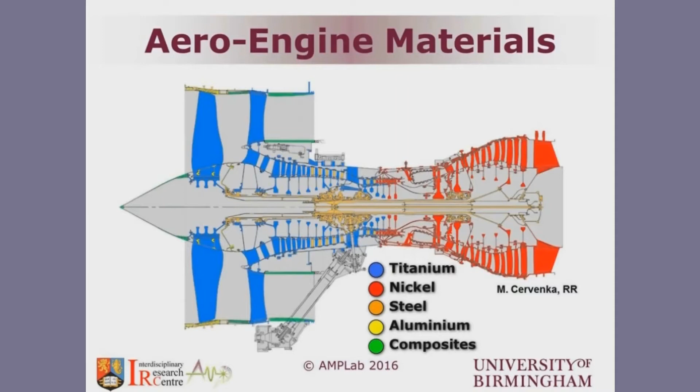Most of the components there are either forged materials or cast materials. There's also the single crystal nickel superalloys, which are used to take very high temperatures towards the back of the engine. In fact, the largest amount of material by mass within an aero engine is probably materials made out of nickel superalloys.

But nickel superalloys are rather complex. They basically contain more than 10 alloying elements in some cases. They can be even more complex beyond that. They contain elements like chromium, for instance, that is used to improve their oxidation resistance, as well as elements like titanium and aluminium that form precipitates to strengthen them. In addition to other alloying elements like molybdenum, cobalt, niobium, zirconium, boron, and iron. And these different alloying elements have various roles in the nickel superalloys achieving their properties that we require.

As a matter of fact, the way that the microstructure behaves is rather complex, since some of these elements partition to specific phases. So for instance, we find that boron can partition to the grain boundary. Titanium and aluminium partition to the gamma prime phase, which is the strengthening phase in nickel superalloys. Some other elements like niobium partition also to the gamma prime and gamma double prime.

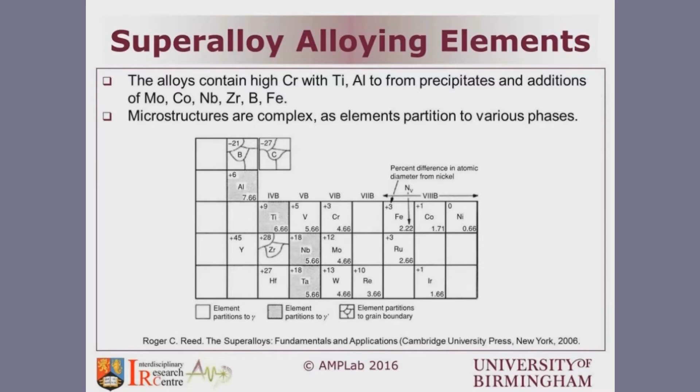So the role of the different elements can be quite difficult, and that adds to the complexity of nickel superalloys in general, and also the complexity of how we think about them as a material to be used for additive manufacturing. I mean, the following slide is probably just to further strengthen the previous point I mentioned.

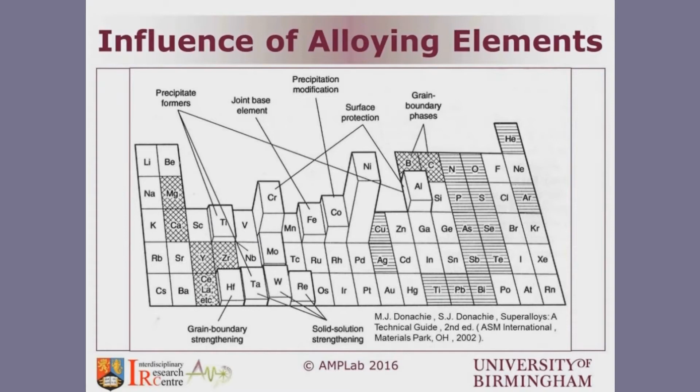It shows what role the alloying elements play in terms of the performance of nickel superalloys. So some elements are used for oxidation resistance, some are used to control the precipitates and their types, some other ones like tantalum, tungsten and rhenium can be used for solid solution strengthening. But overall, if we're dealing with an alloy class that attracts at least a dozen alloying elements, you would expect that this will become rather complex when you look into its processing by any manufacturing technique.

So over the last 6 or 7 decades or so, nickel superalloys have gone through a significant development. All the time we were seeking a higher temperature capability in nickel superalloys. Initially in the 40s, the 50s and some of the 60s, we were looking into the development of the high temperature capability, and initially we started with wrought or forged materials. And eventually we started to look into more complex applications, into blades that can take higher temperatures, and then casting of other materials like Inconel 713, 738 and 247 started to appear between the 60s and the 80s.

But then from the 70s and beyond, we started to move into directionally solidified superalloys and then eventually into single crystals. And as you can see, looking into how the temperature capability of nickel superalloys evolved within the last 60 years, we evolved approximately 400 degrees in the temperature for their creep life at 137 megapascal, as shown in that diagram.

Now, how is that all relevant to the concept of additive manufacturing? Moving in the alloy chemistry and moving in their high temperature capability also meant that we have to move in their chemistry. We have to design an alloy that's capable of giving us a high temperature performance. And as a matter of fact, that resulted in us adding more alloying additions of elements like aluminium and titanium, which can strengthen the material by the formation of the gamma prime phase.

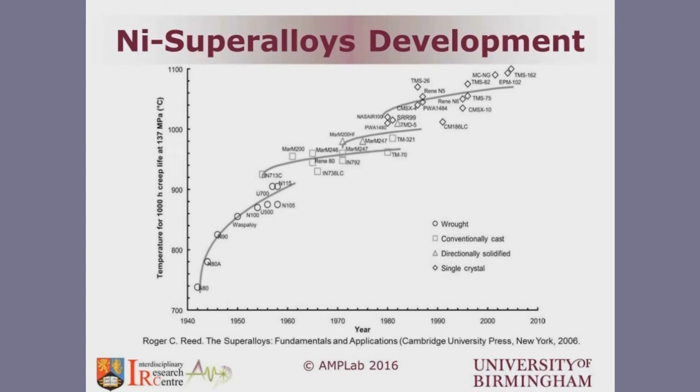We also added some other elements like cobalt and chromium to increase the higher temperature oxidation capability and also the control of the phases that are present, like the carbides, within nickel superalloys. And as a matter of fact, the more we added of these alloying elements, the more it became difficult for us to weld these nickel superalloys.

Basically, additive manufacturing is like welding. You're welding many layers, and instead of welding a few layers as in a weld bead or so, you're welding maybe hundreds or thousands of layers every time you're building a component. And as a matter of fact, the same issues that we see in welding of nickel superalloys will be the same issues we see in additive manufacturing of nickel superalloys.

So this diagram that we see in front of us shows a qualitative indication of the weldability of nickel superalloys as a function of the alloying elements. In that case, on the x-axis, you can see the chromium and cobalt as one factor. There's an equation here, 0.28 chromium plus 0.43 cobalt on the x-axis, and then the aluminium and titanium on the y-axis, which are actually the elements that form the gamma prime phases. And what you will find is that the higher the aluminium and titanium content, we end up getting more difficulties in welding.

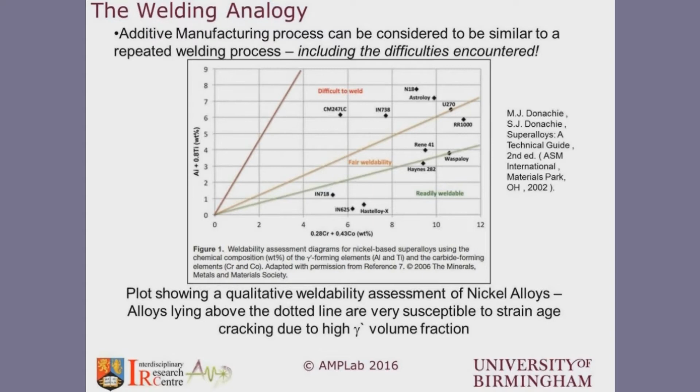So that qualitative classification we see on the diagram shows the typical alloys that people have used in the 40s and the 50s as alloys that are readily weldable. But as we move in that high temperature capability of nickel superalloys toward materials like CM247, we start to appear in the difficult to weld envelope. So what is the real difficulty in welding or additive manufacturing of nickel superalloys? What's the difficulty in making multiple welds of that material, which is the same thing we see in additive manufacturing?

Basically, nickel superalloys, when we weld them, can be prone to 4 mechanisms of cracking. The first one is solidification cracking, and that's similar to cracking that we see in many other materials, not just nickel superalloys, where typically the freezing that happens combined with the segregation during solidification results in the formation of weak regions, which then, with the presence of tensile stresses during consolidation, during shrinkage, can inhibit the backfilling of the interdendritic regions, and as such will open up dendritic cracks and act as crack initiation points during solidification.

So that's one thing that can happen in nickel superalloys with the complex chemistries we see inside them, that when we are building a component by additive manufacturing or even by welding, we are likely to get that mechanism of cracking. The second mechanism is called liquation cracking, and this can usually combine with rapid heating of the material, typically away from the melt pool.

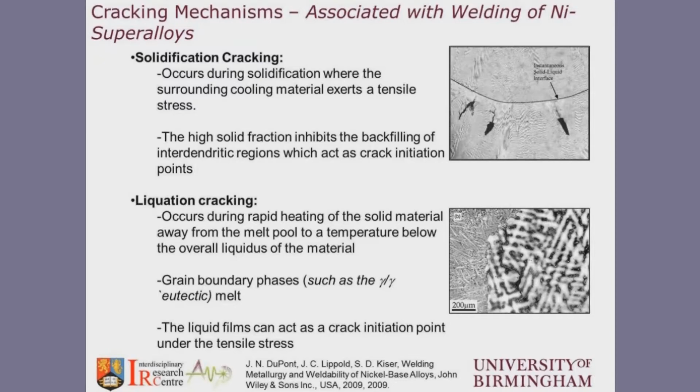So we're talking here about the material which is below the molten region, not just the molten region, but actually what's a little bit close to the molten region, but not in the molten region itself. And some phases will end up actually forming a liquid film that then will form a crack that can act as a crack initiation point under the tensile stresses.

The mechanism itself is not fairly clear about why it happens, but there's a chance that it's accompanied by the presence of phases like carbides causing incoherency on the grain boundaries, combined with the residual stresses, resulting in the formation of cracks.

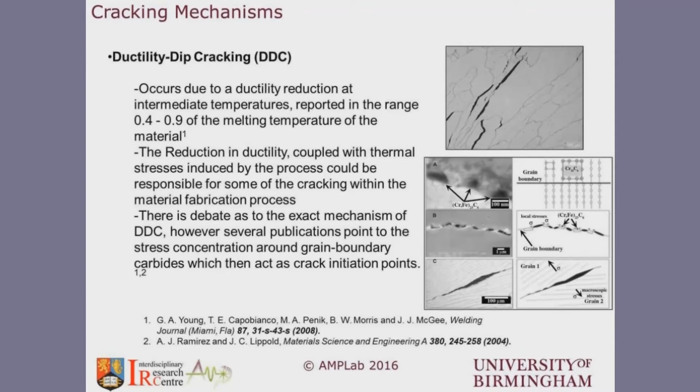Then the fourth mechanism that we also are aware of in nickel superalloys is the mechanism known as strain age cracking, where typically if you weld the component, that welding process with its rapid heating and cooling phases will result in the formation of residual stresses.

So those residual stresses, when we apply a heat treatment to relieve the residual stresses, the competition between the gamma prime precipitation and the relief of residual stresses will result that at a point the material will have combined stresses from the shrinkage related to the gamma prime formation and the ductility resulting from the presence of cracks. And as a result, cracks will open up.

In simple terms, typically you will end up building a material by additive manufacturing or welding it, and when you weld it or build it, it doesn't show any cracks. But then you expose that material to a stress relief heat treatment, and it actually cracks within the post-weld heat treatment process. And that's what's known as strain age cracking, or post-weld heat treatment cracking.

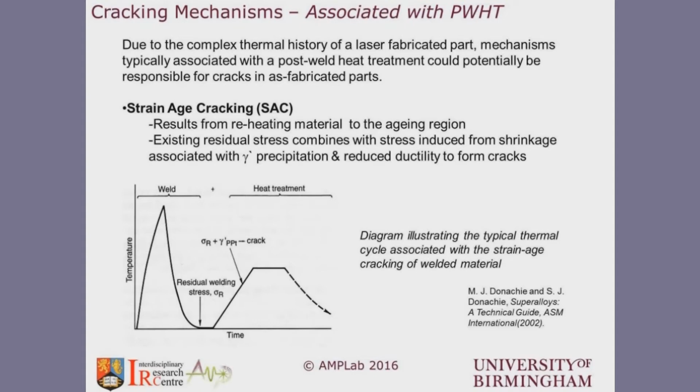So any of these four mechanisms, in the same way that they happen in welding, they can happen in additive manufacturing. And for a crack to happen, as it's obvious within the four mechanisms, there has to be another element, which is residual stresses. And that adds to the complexities we have in additive manufacturing, that the process involves repeated heating and cooling, and as a result, we need to control the residual stresses that happen, or at least understand how they evolve.

There are some good reports in the literature talking about the residual stress development in additive manufacturing. This is the results from one paper by Professor Das, looking into the distortion due to electron beam selective melting in Inconel 718 nickel superalloy. 718 as an alloy is known to be weldable. Actually, it's an alloy that you can build with additive manufacturing without seeing a significant amount of cracking.

But what you can see is that the substrate where the component was being built in figure D and C, you can see the amount of distortion that the component has seen. And that's significant. Obviously, that's a significant deviation of tolerances, a significant deviation of the required performance of the parts, and in most cases that will require a post-processing treatment to be able to control the residual stresses.

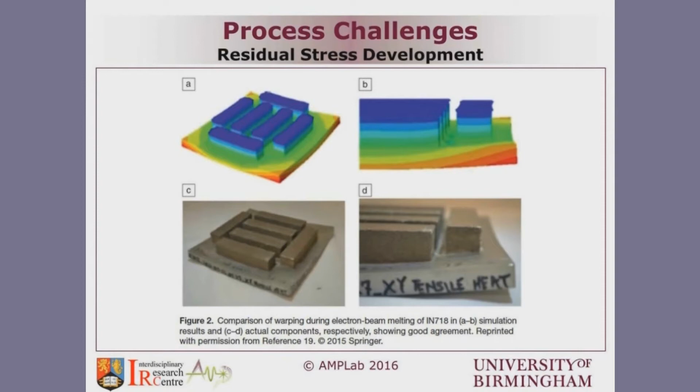But one of the key things that people have been active in developing to understand residual stresses is process modeling. And as you can see, with process modeling you can get an idea about the amount of distortion and the amount of stresses built within the material. And as a result, you can change your process sequence, or you can change your process parameters, including the scanning strategy, how the heat input is being applied, in order to reduce the stresses in the material in the as-built condition.

There are some reports also that looked into this in a different way. This is a study that came out from Fraunhofer ILT in Germany, where they looked into the influence of the scanning strategy. So basically, this is a comb-type structure, as you can see the teeth at the bottom, and they tried two different scanning strategies. The first one is A, where we're using short scanning vectors, and in case B, we're using long scanning vectors across the entire length of the component.

And as you can see, the short scanning vectors gave a slightly lower distortion, which basically explains that it has lower stresses inside, lower tensile stresses in that component. The component was validated, so they built the actual component, and then they used wire EDM to cut the teeth of the comb, except for the left-hand side end. And the amount of relief that you get because of the release of the stresses can be used qualitatively to indicate the amount of distortion.

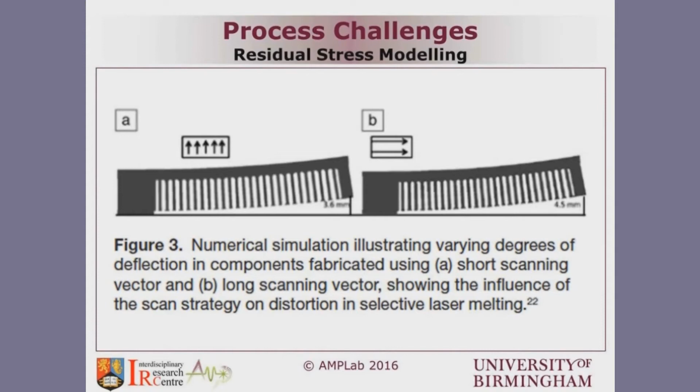But the key point we want to see here is that the process itself can be rather complex, and one change in one of the parameters, which is in this case the scanning strategy, will control the thermal fields, and as a result will also affect the amount of distortion we're getting out of the process.

The second thing that we discussed in the paper was the process optimization. How do we go on optimizing the process parameters in additive manufacturing?

For quite some time, people have been using the energy density model, which is basically an equation that lumps together many of the process parameters in a single figure of merit, a single factor, that indicates how much heat we're giving to the material, how much energy density, as a matter of fact, is being given to the material.

And that simple equation is the power over the scan speed, V, times the hatch or overlap spacing. In some other versions, we have the power divided by scan speed times hatch spacing times layer thickness. So generally speaking, this equation was used to correlate the heat input with the defects that form in the process.

In one of our reports that we published, we showed that the increase in the energy density is typically accompanied by the reduction in the porosity. So the red diamonds show a reduction in the voids or the porosity until a certain level. We call it the threshold energy, beyond which the porosity typically stays within less than 1%.

But the second factor we see is the cracking, and we do not see significant correlation here between the cracking density, which is the blue squares, and the energy density. As a matter of fact, it seems quite random to some extent. So that approach can give us a starting point, how much energy we need to give to the material to enable its consolidation, but it doesn't correlate much with cracking density.

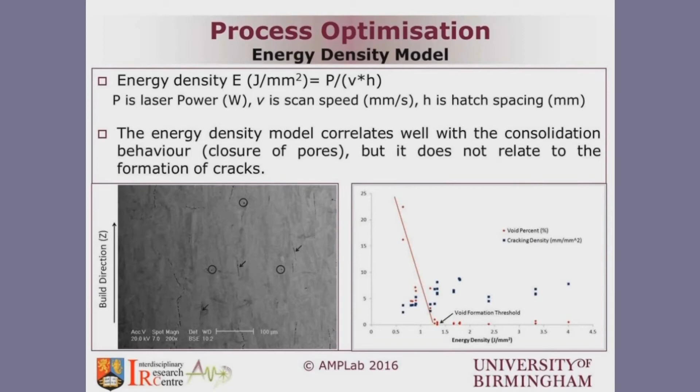And in many cases, the challenge is we have two problems to solve. As you can see in the left-hand side picture, there are the cracks, the ones that are arrowed, and the porosities, which are encircled. Basically we're trying to see if we can reduce both at the same time. In many cases, reducing the porosity means giving high energy, but reducing the cracking means giving lower energy, because the higher the energy, the more residual stresses we create in the material.

There's another report we also included in the paper, whereby we combined the data from five different studies that looked into different nickel superalloys: Inconel 718, 625, 486, 247 in different conditions. And we found again that to process nickel superalloys, you need to achieve that threshold energy density, a minimum level of maybe between 1.3 to 1.7. Beyond that level, you end up having very low porosity in the material, less than 1%.

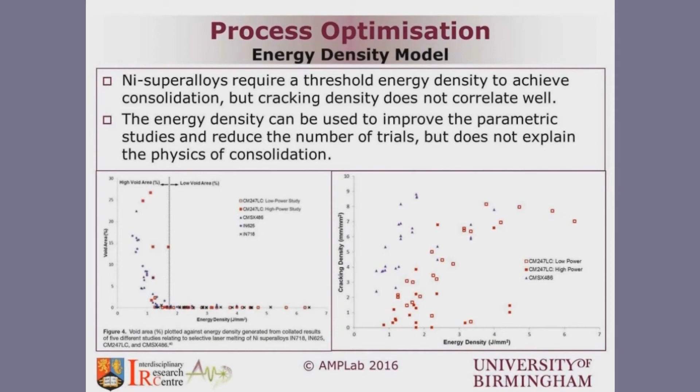But that correlation did not hold, as I mentioned previously, when it came to cracking. We still had basically an increasing trend of cracking density with the increase in the energy density, but there was still some scatter in the data, suggesting that maybe that model is good enough to look into the porosity, but it's not the best when it comes to the cracking density.

Now, where is the future heading in additive manufacturing of nickel superalloys? Many studies have shown, and as a matter of fact it's on the cover of the MRS Bulletin issue, that one of the flexibilities we have in additive manufacturing is that we can control the microstructure. The typical microstructure we get from additive manufacturing has columnar grains in some cases, extending from the bottom to the top of the build.

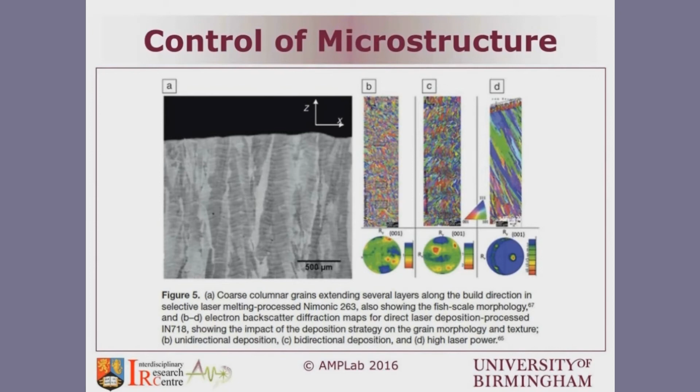Combining these things together means that we should change the way we look at additive manufacturing, from just making a component with specific properties and microstructure into making a component with more than one microstructure, with the microstructure tailored to the performance required of the final component. Then the last challenge we have to address with additive manufacturing of nickel superalloys is the mechanical properties.

Obviously, if you want to make a component, we want that component to achieve the correct mechanical properties. And there are some studies now in the literature that show that there is an increasing importance for the use of a post-processing method like hipping, like using hot isostatic pressing. So the study by Blackwell showed that you can achieve UTS and yield strength, in fact, exceeding what we get from the forgings just by doing a post-processing and heat treatment procedure involving hipping and heat treatment for Inconel 718.

And that obviously shows that it's in some way a necessity actually to use post-processing in many applications, the thermal post-processing in this case. And if you look into even the ASTM standards on Inconel 718 and Inconel 625, they both actually indicate that hipping is used whenever there is a need to maximize the performance.

There aren't many data in the literature yet on the fatigue behavior of nickel superalloy additive manufactured components, but tensile results have been promising, and I expect the results that involve creep and fatigue to appear very soon, and then we'll understand if we can improve the performance by post-processing of additive manufactured components.

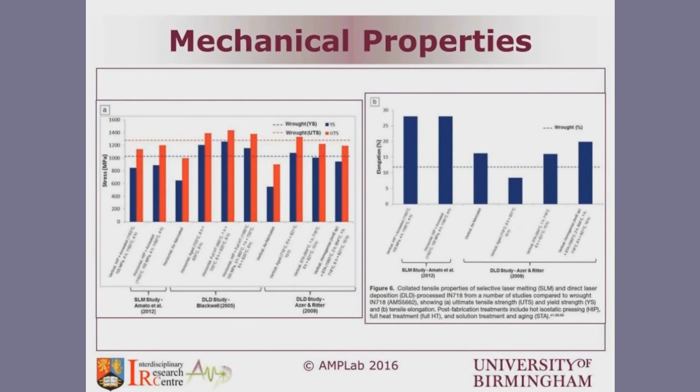So in conclusion, in this brief talk I gave an overview of the topics we discussed in the paper, issues like the residual stress development, the microstructure and properties development, and process optimization. We still have to do some more work in that, the combination of modeling and experimental verification of our finite element models and other models to look into how we can control the residual stress state, and the microstructure and properties development is equally important.

There are some useful tools that we can use, like the energy density method or simple modeling tools, to get an idea about how the parameters affect the performance. But we also hope that in the future, the additive manufacturing platforms will improve in their flexibility to allow us to design the microstructures and control the process in a more efficient way to reduce the residual stresses or maximize the mechanical properties.